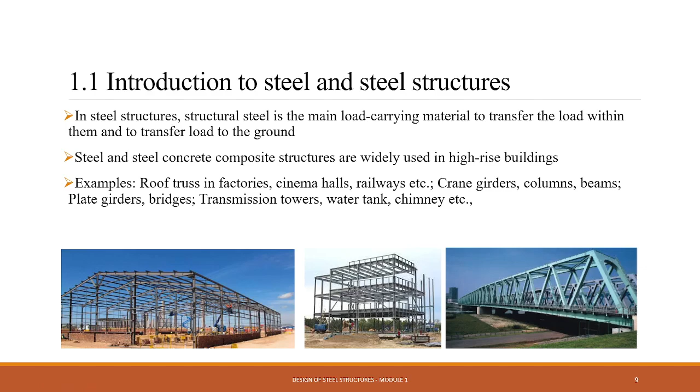Usually they are mainly used in high-rise buildings. Some examples are listed here: roof truss in factories, cinema halls, and railways.

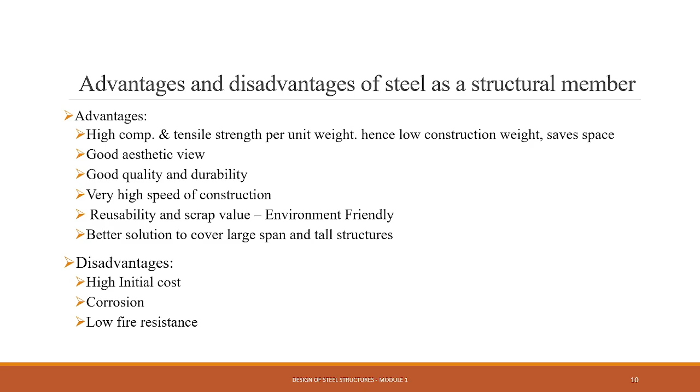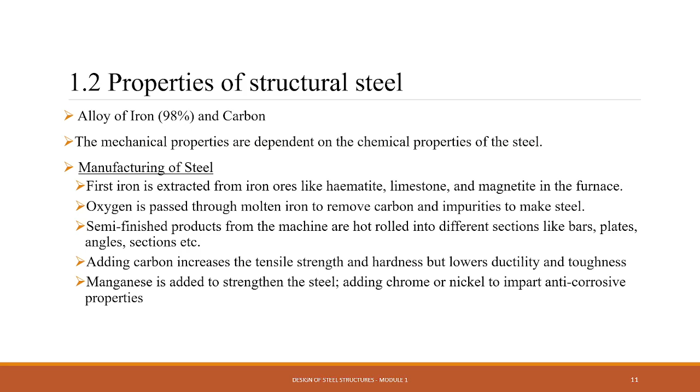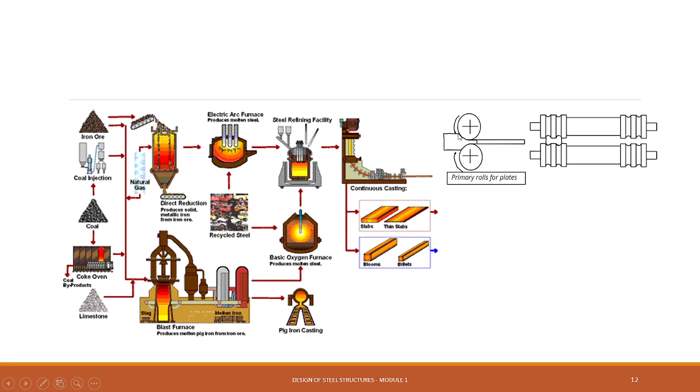This is just a figure showing the manufacturing process of a steel element. Basically the iron ore is taken, oxidized, and impurities are removed, then we hot roll it into different sections. This is the rolling process - through these rolls, different shapes of sections will be created.

What is the optimum percentage of carbon? Usually the optimum percentage of carbon is between 0.12 to 0.25%.

This table shows the different types of pig iron: cast iron has 2.5 to 4.5% carbon, whereas wrought iron has only less than 0.2%. It is one of the purest forms of iron.

Normal steel, that is mild steel, which is commonly used, has carbon content from 0.1 to 1%. Since the carbon percentage is higher in cast iron, it has high strength and anti-rust property, but the problem is that it is very brittle.

Since it is anti-rust, it is used for making water pipes, sewer pipes, and drain pipes. The water transport pipes we usually see are all cast iron pipes.

Next is wrought iron. Wrought iron has a very low carbon percentage, less than 0.2% only, so it may be more ductile.

Since the percentage of carbon is lesser, it is subjected to corrosion easily. So it is mainly used in applications where ductility is very important, that is, in chains, crane hooks, and railway couplers.

Next is steel, which is commonly used. The percentage of carbon is 0.1 to 1.1%. So basically here it has some kind of strength and ductility.

It also rusts easily since the amount of carbon is lesser compared to cast iron, and it is used to make structural steel, bolts, nuts, and rebar. So these are the various types of pig iron.

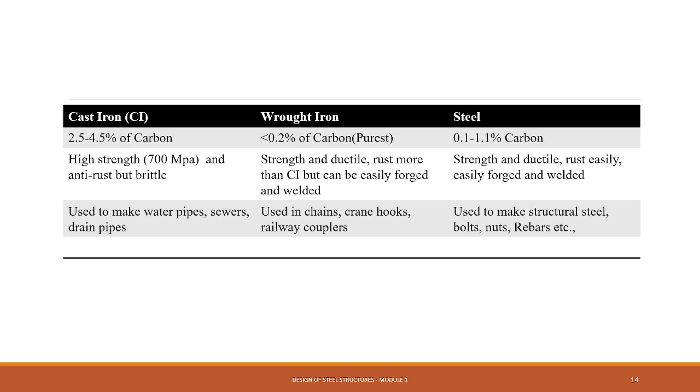Steel is further classified into mild steel, medium carbon steel, and high carbon steel. Steel is an alloy of iron and carbon, where carbon is present from 0.1 to 1.1 percentage. If the percentage of carbon is less than 0.25 percentage, we call it mild steel. If the percentage of carbon is between 0.25 and 0.6%, it is medium carbon steel. And if it is greater than that, 0.75 to 1%, it is high carbon steel.

Some of the properties of steel are given below. The steel density is 7,850 kilogram per meter cube, value is 78.5 kilonewton per meter cube. These properties are given in IS 800 in clause 2.2.4. So what is the modulus of elasticity of steel?

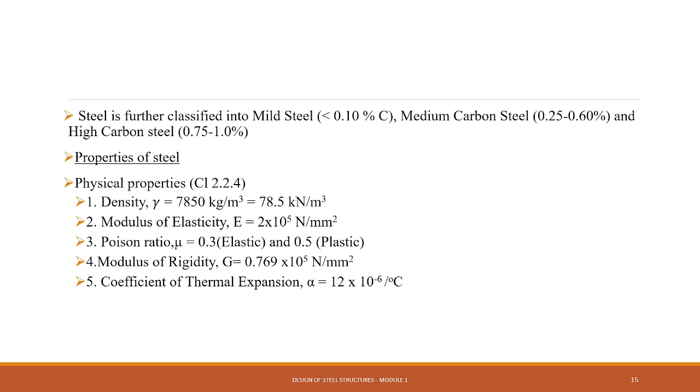It is 2 into 10 raised to 5 Newton per millimeter square. Poisson's ratio is usually 0.3 for elastic and 0.5 for plastic, and modulus of rigidity G is 0.8 into 10 raised to 5 Newton per millimeter square, and coefficient of thermal expansion alpha is equal to 12 into 10 raised to minus 6 per degree Celsius. All this is given in our IS 800 code, clause 2.2.4.

Next we will study about the types of structural steel sections. Steel is basically rolled into required shape during fabrication, which we already discussed. What are the common sections of steel available in the market?

First one is the I section, a typical wide flange I section, normal I beam. Then there is a T section, shape is like a T. Then there is a channel section, C-shaped section, called channel section. Then there is an angle section or an L-angle section. Then there are square tubes, circular tubes, like that. So different types of sections, and these properties are given in the standard steel tables.

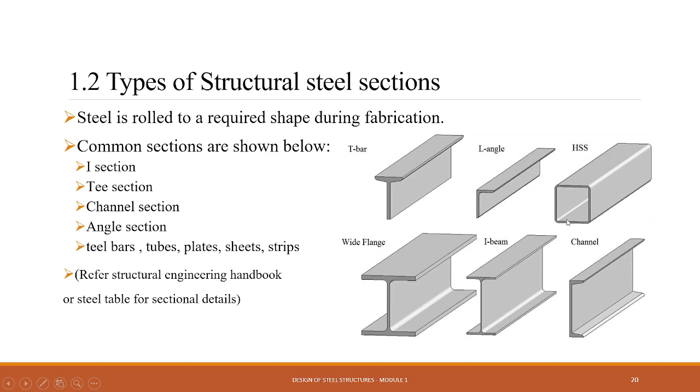Now, what is rolled I section? I section basically means it is having a web area and a flange area. The types of I section usually used in India: first is ISJB, which means Indian Standard Junior Beam. Next is ISLB, Indian Standard Light Beam. Then ISMB, Indian Standard Medium Beam. Then there is ISWB, which is Indian Standard Wide Flange Beams, and ISHB, which is Indian Standard Heavy Beams.

Each beam type has its own applications. Usually I-beams or I-sections are used as beams and columns. In normal structural buildings, structural steel-based buildings or structures, I-sections are used as beams and columns. Here is a figure showing an I-section as a column and an I-section as a beam. So there are these types: ISJB, LB, MB, WB, HB.

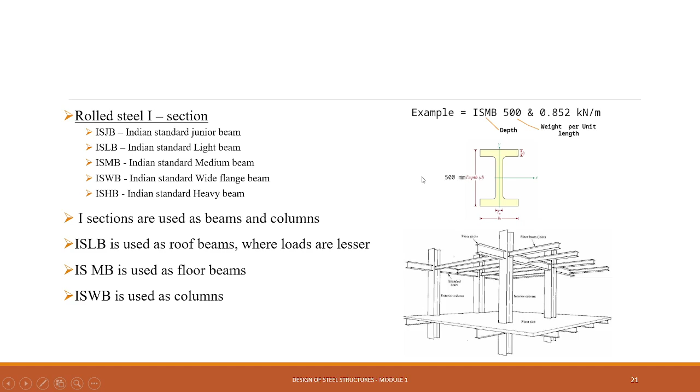Next type of section is the T section. T sections are divided into four types: ISNT, HT, LT, and ISLT. ISNT means Indian Standard Normal Beam, HT means Indian Standard Heavy Beam, and ISLT means it is a special legged...

The T sections are normally used to transmit bracket loads to columns.

Next is the channel sections. They are classified as ISLC light channel, MC for medium channel, and ISSC for Indian standard special channel sections. Channel sections are usually used as beams, especially in roof trusses, because they resist the bending moment. Examples include their use in purlins, and sometimes larger angles like channel sections such as ISHC and ISLC are used to make built-up columns.

Channels also have a flange. The outer portion is called flanges, and the middle portion is called the web. So the bottom will be having it and the flange portion is there. Different types of sections have different types of applications.

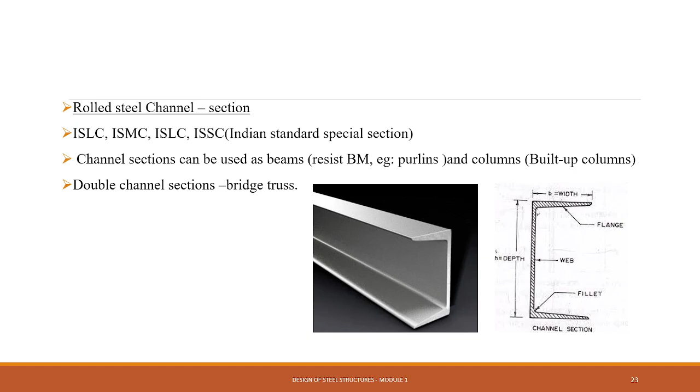Next type is the angle sections. That is Indian standard equal angles ISA, Indian standard unequal angles, and Indian standard bulb angles also. This figure shows Indian standard angles.

Angles will be having two portions, one leg and the other leg. If both lengths are equal, we call it equal angles. Sometimes one leg is larger than the other, so it is called unequal angles, and this is a bulb angle.

Angles are mainly used as axial members in purlins, that is in trusses. They are used to make built-up sections, connection members between beams and columns, as lacings and battens, etc. Bulb angles are mainly used in shipbuilding.

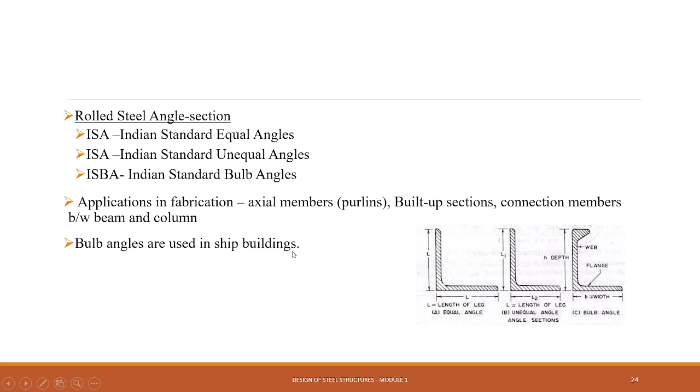Next we study about connections, that is both welded connections and bolted connections, which are very important. One important topic will be coming: what is the need of connections?

While fabricating structures, we are basically joining different elements of a structure, that is, beams and columns are joined together. To facilitate this joining, we use connections. The fabrication of a structure between two or more members is made through connections only.

Here we can see one beam I-section connected with another I-section using a plate, and this is a bolted connection. This is another joint, and it is joined by a welded connection.

Connections help to make up buildings. Connections are also used in built-up sections, which we will study in later lectures, and also in very long sections, because in factories the standard sections are like 6 meter or 12 meter lengths. So we basically require connections to join them to make very long or very large sections.

These are also critical members in the structure, because if a connection fails, the whole structure is liable to collapse. So we must be very careful when designing that a connection must not fail before the failure of a member.

A member can fail either by shear or flexure or bending, etc. In steel structures, we must always design a connection so that it does not fail, and we must ensure connections do not fail before the members. This is because connections are less ductile compared to members.

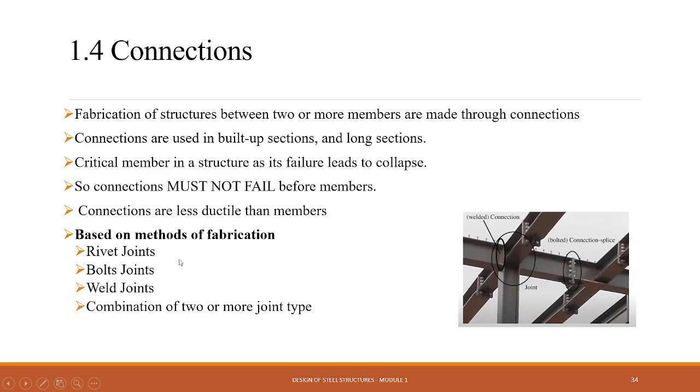Based on the method of fabrication, or what type of method we use to join these members, connections are usually classified as riveted joints, bolted joints, welded joints, or we can use a combination as well. Next we study about joints.

This is based on the alignment of the plates. Joints are classified as lap joint and butt joint. This is the important point here.

Lap joint is the simplest form of joint, where plates are connected overlapping one another. If we want to join one large plate with another plate, we can simply lap them with a particular distance and bond them to create a very simple large piece. This is a single lap joint.

What about butt joint? In a butt joint, we join two plates that are in the same plane, so we have to provide a cover plate. Providing a cover plate on one side is called single cover, and on both sides is called double cover.

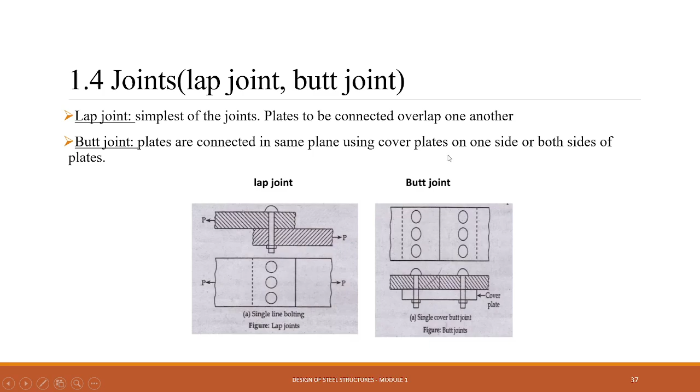These types of joining have plates joined in the same plane. When plates are connected in the same plane using cover plates, we can call it a butt joint. So this is the basic difference between a lap joint and a butt joint.

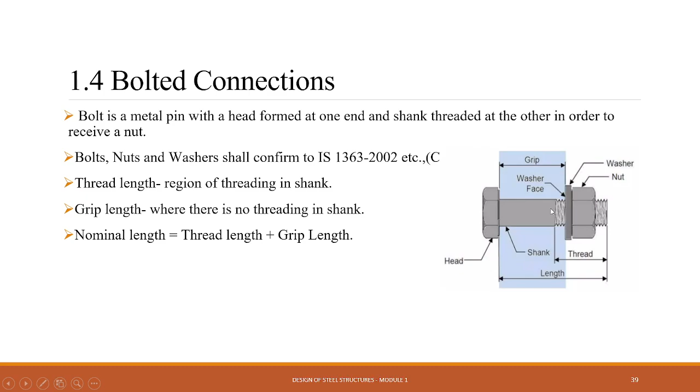Sometimes indirectly there will be plates, so the distance from the head to the washer is called the grip length. The smooth face is called the shank area, and the threaded portion is the thread area - the region of threading in the shank. Grip length is where there is no threading in the shank. Nominal length will be the total thread length plus the grip length, giving the total length. This is a figure of a bolt showing the head, shank, thread, and grip length.

Now, these are the advantages of using bolted connections. Let me pause the video a little - what are the advantages of using bolted connections?

Less manpower is required - a single or few laborers can install several bolts inside the steel sections. These bolts are of different grades and sizes. High strength friction bolts are much stronger than rivets, so we can reduce the number of bolts used, because as we increase the grade of the bolt, we can use a lesser number of them.

So a lesser number of bolts in the plate also helps, because basically in a bolted connection we are creating bolt holes, and each time we create a hole, the strength of the section of the plate is compromised.

The next advantage of bolted connections is that they require less fastening effort than riveted joints, because we can use high strength bolts. Also, bolting operation is more silent and faster than the riveting process.

The riveting process is very loud since we apply pressure for riveting. Compared to that, bolting is much more silent. Also, riveting uses high temperature, but bolting is basically a cold process, so there is no risk of fire from heating or welding.

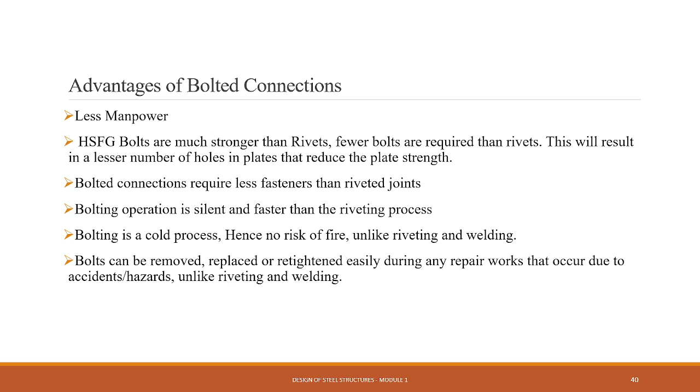Also, compared to a rivet, the advantage of a bolt is that it can be easily removed.

Now we discuss the disadvantages of bolted connections. Bolted connections have lesser strength in the axial tension area, as the area of the root of the threads is lesser, since only a small area of the bolt is joined with the plates. So there is always a chance of failure in shear and bearing.

Also, the problem is that under dynamic or variable loads - when the load is increasing or decreasing - the bolt can easily get loosened. Once the tightness is lost, it reduces the load carrying capacity.

Usually unfinished bolts have lesser strength due to non-uniform diameter. Compared to a rivet, which is very uniform, bolts have a shank and thread area, which causes some variation in strength.

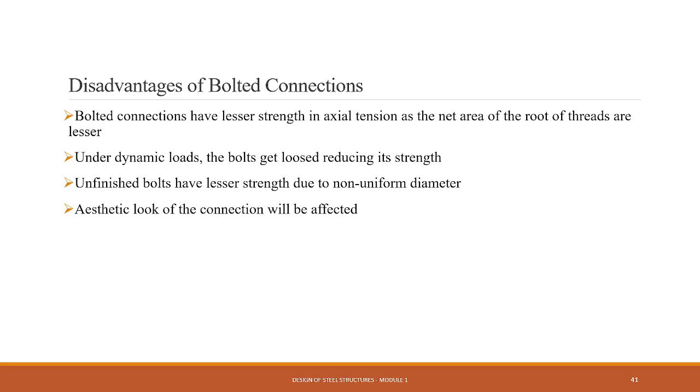Also, the aesthetic look of the connection is affected compared to a welded connection, which has smooth, seamless joints. Bolts protrude along the joints, which can sometimes be aesthetically displeasing.

Now we discuss the types of bolts. What are the different types of bolts? Basically there is the ordinary bolt and the high strength bolt, classified based on strength, or we can call them black bolt or turned bolt, and high strength friction bolts, based on the type of shank used.

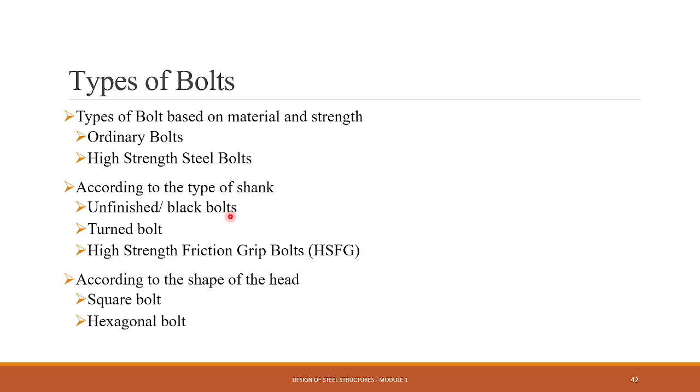Briefly, we will study what is basically a black bolt, though it's not very important from the exam point of view. Mainly for the exam, we should study the advantages of bolted connections or riveted connections, and the advantages of welded connections versus bolted connections.

This is a basic question that can be asked: what is the advantage of steel or steel structures? We can study the different types of bolts. Basically, what is blackbolt means is whatever ordinary bolt we are using, like blackbolt.

It is graded from M5 to M36, and the diameter size M36 means the diameter will be 36mm. Usually for structural steel work, we use M16, M20, M24, M30. This range of bolts forms a lot of structural steel works, especially for multi-story structural buildings.

Mainly, we use these ordinary bolts for light structures having static loads, mainly used for purlin members in roof trusses. Where there is any chance of vibration or impact or fatigue, we cannot use these ordinary bolts.

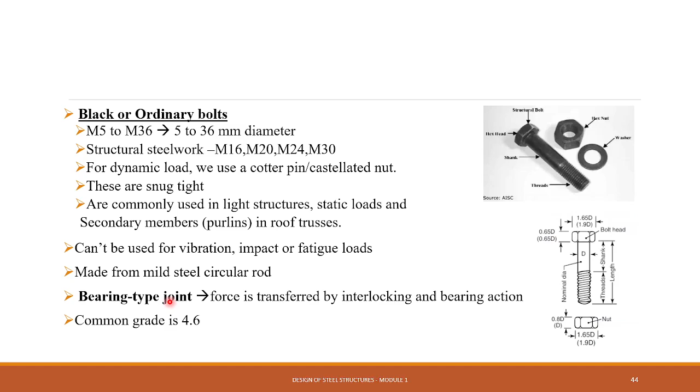Usually, if you are using ordinary blackbolts, this type of joint will have bearing type joints. The load is transferred by interlocking and bearing, and the common grade is 4.6. What is 4.6? We will discuss in the coming classes.

The next type of bolt, compared to our ordinary bolt, is called high strength friction grip bolt. Diameter will be from M16 to M36, and these are made from medium carbon heat treated alloy steel, whereas ordinary bolts are made from mild steel. Obviously the strength will be lower in ordinary bolts and higher in high strength friction grip bolts.

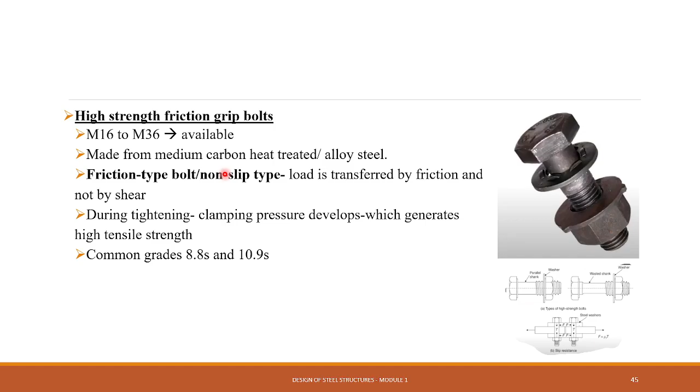Here load is transferred, by the name itself, by friction, and not by shear. When we tighten the bolt, a clamping pressure is generated and load is transferred through the friction between the bolt and the plate. This grade will be higher, say 8.8 and 10.9. This shows the advantage of the high strength friction grip bolt.

Next we study in detail about the lap joint and butt joints in bolted connections. This is more important for the exam, as design of lap joint and butt joint is a common area for questions. So what is basically known as this lap joint?

Lap joint means the plates will be overlapping each other, pasted over one over the other. Here there will be two different planes. If this is force P1 and this is P2, then P1 and P2 will be lying in different planes, so there will be some gap between these two forces.

Due to this gap there will be an eccentricity, and this eccentricity will create a couple. So in a lap joint, an extra moment has to be resisted. This joint must resist this extra moment or couple due to eccentricity between the plates, basically due to the geometry of the lap joint.

As per IS 800, if the grip length is less than 5 times the diameter, we can neglect this effect of bending. So what is the grip length? In this figure, grip length basically means the distance between the head of the bolt and the nut portion.

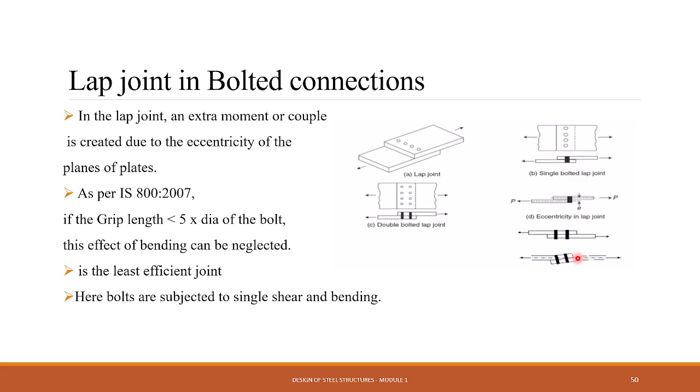In a butt joint, the plates are joined together into a single plate. Both plates will be joined together, and so both plates will be the same. The whole line of application of the force will lie in a single plane only.

So what happens in a lap joint? The lines of action of the forces were at different levels, at an eccentricity.

There are two types of butt joints. If you provide one cover plate on one side, it's called a single cover, and if you provide two cover plates on the bottom and top, it's a double cover. Either way, we require a cover plate for joining these plates into a single plate, since we cannot join them using bolts alone.

In a single cover butt joint, the line of action is the same, but the connection is not symmetrical. Symmetrical means there is some extra weight of cover plate on the top side, so even though the line of action is same, the connection is not symmetrical.

In a double cover joint, the line of action is also the same, and the connection is symmetrical because there is an upper cover plate and a lower cover plate. So we can say that the double cover butt joint is the most efficient joint.

The shear capacity of bolts will be double in case of a double cover butt joint. This is because there will be two plates to resist the shear, and the force will basically become half when there are two shear planes. So the bolt capacity will effectively be doubled.

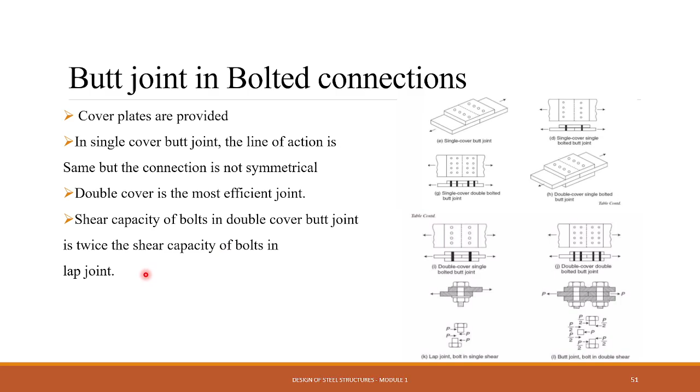For example, if you try to find the shear capacity of bolts in a lap joint and a single cover butt joint, it will be lesser compared to a double cover butt joint. There will be twice as much shear capacity for the bolt. So the shear capacity in double shear will be twice the shear capacity of a bolt in a lap joint or a single cover butt joint.

The next important and relevant topic is failure of connections, failure of bolted joints.

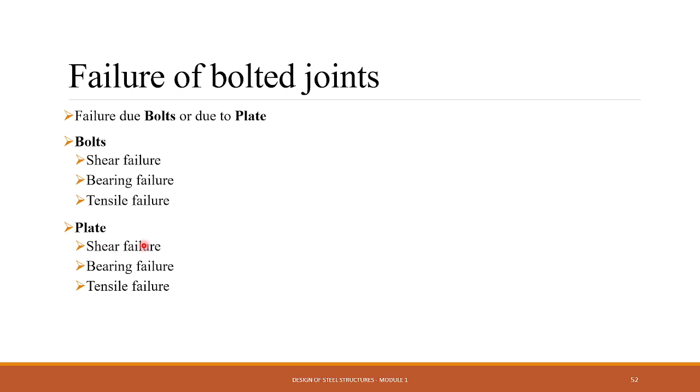These are the failures that may occur: shear failure, bearing failure, and tensile failure in the bolt, and similarly in the plate there will be shear failure, bearing failure, and tensile failure.

What is shear failure? When a load is applied on plates, shear stresses are developed as the plate slips due to these loads. This is the normal case with the plates, and the shaded portion shows the plates. When the load exceeds the capacity, the edge of the plate will exert a shear force on the bolt.

In a lap joint and single cover butt joint, the shear acting plane will be only one. In a double cover butt joint, there will be two plates - one cover plate at the top and one at the bottom - so the number of shear planes will be two. We can say the bolt will fail in double shear in case of a double cover butt joint, and in case of a single cover butt joint, the bolt will fail in single shear.

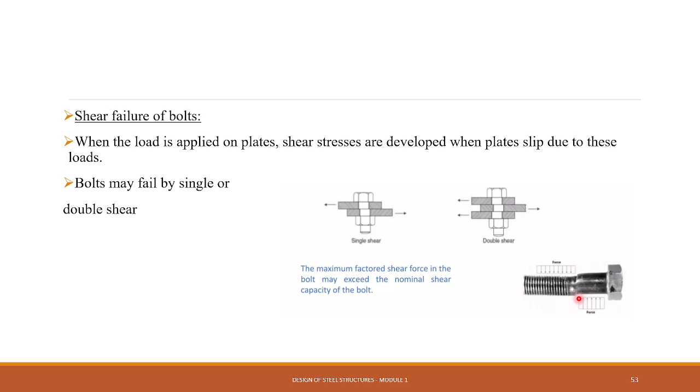The maximum factored shear force in the bolt may exceed the nominal shear capacity of the bolt. Due to an applied load P, a shear force will develop at the contact between the plate and bolt. Since the bolt itself has a certain shear capacity, when this force exceeds that capacity, the bolt will fail. This shows how the shear force is developed, and due to this, shear failure of the bolt will occur.

Next is the bearing failure of bolts. So what do you mean by bearing failure or bearing stress? It is a stress which is developed or exerted at the point of contact between two different materials.

We know that the non-threaded portion of the bolt is called the shaft. So the plates are made of high strength steel and the bolts are made of lower strength steel. This is the scenario for occurrence of bearing failure in a bolt.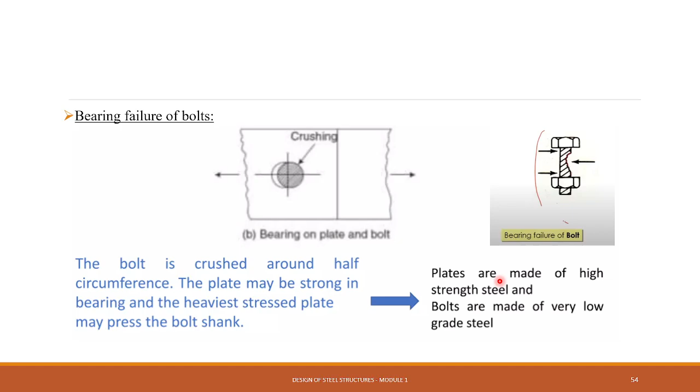Next type of failure. So what we have discussed is the shear failure of bolt and bearing failure. Now, there is a tension failure of bolt.

Due to this tightening, if we increase it beyond a particular limit, there are special tightening tools with gauge measurement instruments for bolts. If we exert a particular pressure, what will happen? There will be a tensile force created. So due to tightening, the tensile force will develop throughout the bolt, and the bolt will feel this effect.

It's just like we do a tension test on a mild steel bar, here applied to a bolt. So the bolt is subjected to tensile force and fails if the applied tensile force is greater than the tensile strength of the bolt. The tension capacity depends on the tensile strength and the minimum cross-sectional area of the bolt.

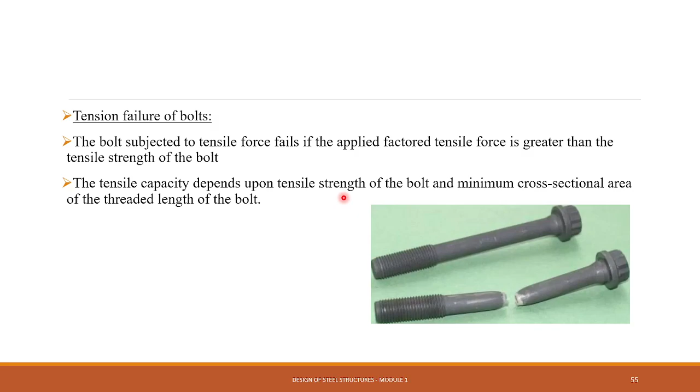Next we study the types of failures in plates. The first type of failure is called the shear failure or block shear failure of the plate. We discussed earlier that for a bearing failure to occur in a bolt, the situation is that the plate has higher strength and the bolt has lesser strength.

So in this case, for a shear failure to occur in the plate, the bolt must be of higher strength and the plate must be of lesser strength compared to the bolt. Here the bolt will be of higher strength. When load occurs, what happens? At the contact between the bolt and plate, a bearing type of failure occurs.

Not shearing, because if the force is parallel, shear stress develops, and due to the lesser value of edge distance, there will be a block type of shear failure. Block means like a rectangular block. So the bolt may be placed at a lesser end distance.

This can be prevented by adopting sufficient end distance or edge distance. Usually in design we don't consider these types of shear failure, right? We ensure this by providing adequate edge or end distance.

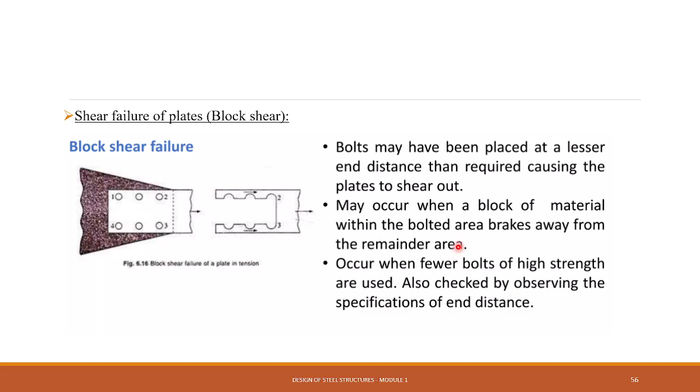This may occur when a block of material within the bolt area breaks away from the remaining area because of lesser edge distance. It occurs when fewer bolts of high strength are used. Usually it may occur when high strength bolts are used but in fewer numbers. Also check by observing the specification of edge distance. So this is the shear failure of plates.

Next is bearing failure of plates. As we discussed, we are using high strength bolts. What happens during slip? Bolts are subjected to shear force. They come in contact with the plate and crush it, since the plate material is weaker than the bolt material.

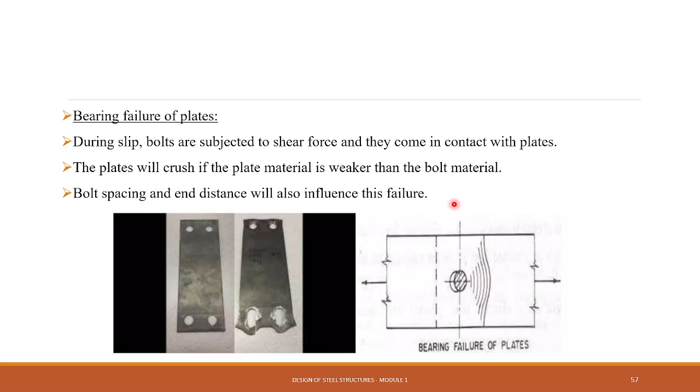Here also the bolt spacing and edge distance will influence this. If the pitch or end distance is adequate, we can prevent this type of bearing failure. Both block shear and bearing failure can be avoided by providing proper spacing between the bolt and edge distance.

The last is the tensile failure or tearing of plate. This depends on the load mechanism and the strength of plate. This is an example for tensile failure: the plate is under tensile load, and this is the weak point where a crack forms along the bolt line and the plate fails. This tension failure occurs because the bolts are stronger than the plates, so correspondingly the plates will be weaker and subjected to tensile failure.

In tension, both the gross area and net area may be present. In case of tension, we can consider the gross area. So what is the difference between gross area and net effective area?

Usually this is a plate. So what happens for bolting? We will cut holes in the plate.

This is the side view of a plate, and this is its area. Due to bolting, we will cut area like this out of the plate. This cut area is called the net effective area, which equals the plate area minus the bolt area.

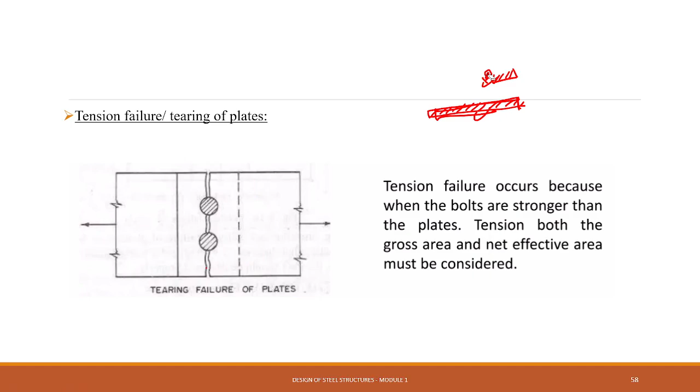Tension can occur here, or sometimes exactly along the net effective area. This is called the net effective area because there will already be holes for placing the bolts, which creates weak areas inside the plate. So when the tensile force acts, the crack will open or failure will occur along this net effective area plane. Next topic is the grade of bolts.

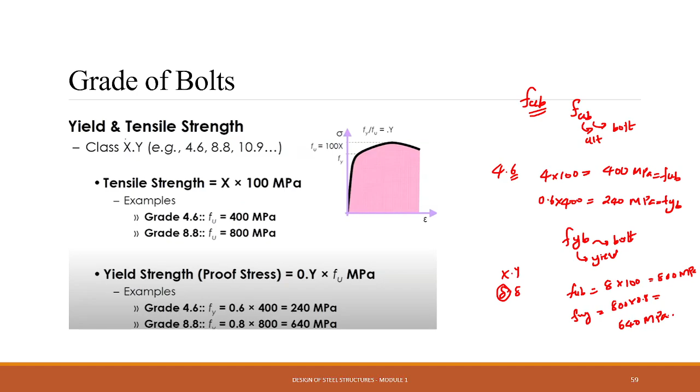The spacing taken in the direction of the load is called pitch. So pitch is the distance between two consecutive bolts measured parallel to the direction of force.

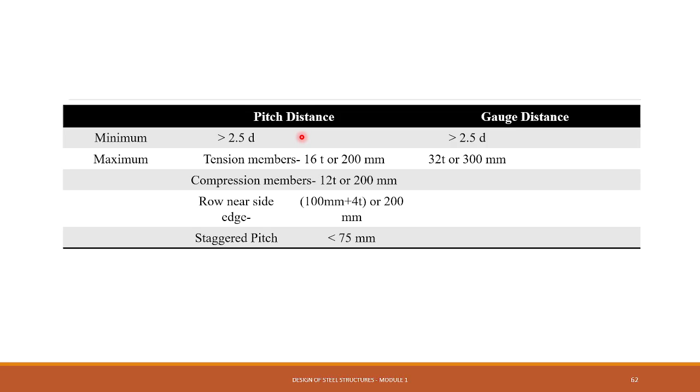The next important term after pitch and gauge is end distance. What is the difference between end distance and edge distance? Similar to pitch and gauge, end distance is the distance between the center of the bolt and the edge, measured parallel to the direction of force - that is called end distance, measured from center of bolt to edge of the plate. Edge distance is the same concept but measured perpendicular to the direction of force.

So here in this figure, this is the pitch, measured parallel to the direction of force. This other distance is the end distance - the distance from the center of this bolt towards the edge, as shown here. What about edge distance? It is the distance from the center of the bolt towards the edge of the plate, measured in the perpendicular direction. So these are the four terms.

That is, pitch, gauge, edge distance and end distance. Always remember: pitch means parallel, P for P. So pitch will be parallel, and gauge will obviously be perpendicular. Similarly, end distance is parallel, so the opposite, edge distance, will be perpendicular.

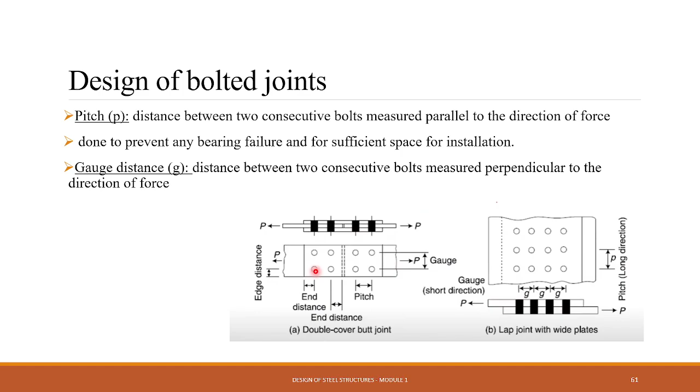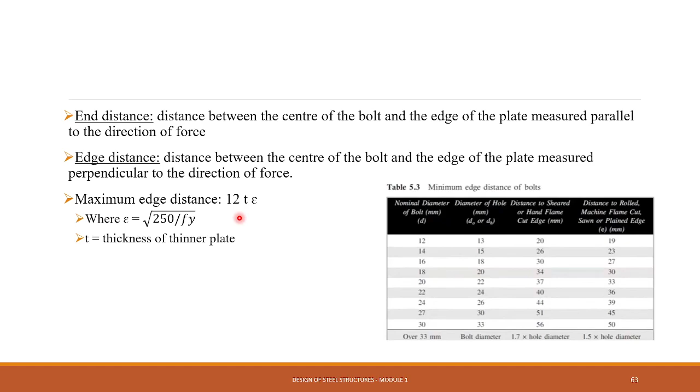In the code there is a maximum value of edge distance. The minimum value is given according to the nominal diameter, as minimum edge distance of bolts. These equations are all given in the code itself. The maximum edge distance will be 12 times T, thickness of the plate, into E, where E equals root of 250 by Fy. Normally while solving problems, Fy is taken as 250, so this term becomes 1, and the maximum edge distance we can provide is 12T. We cannot simply increase the edge distance for safety - there is a limit provided in IS code, which is 12T into E, where T is the thickness of the thinner plate. Everyone should note that T refers to the thickness of the thinner plate.

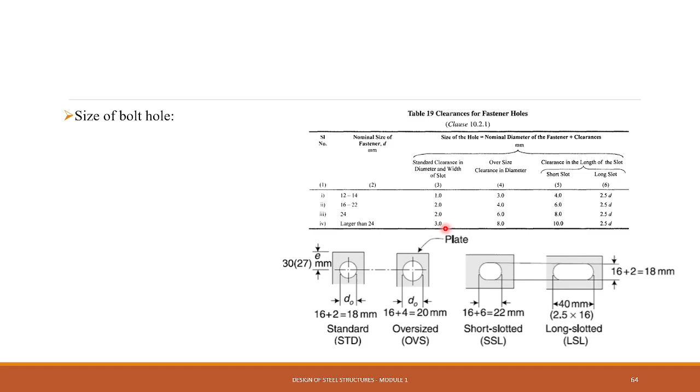There is another topic regarding the size of bolt hole. In some calculations we use the diameter of the bolt hole instead of the diameter of the bolt itself. Usually if the nominal size is like 12 to 14, we apply an allowance - that is nominal diameter of the fastener plus clearance, an extra 1mm. The standard clearance with the width of the slot is given in the code. Usually in exam questions, the nominal size is between 16 and 22, so we add the standard clearance plus 2mm to get the bolt hole diameter. Usually we apply the standard clearance, so for size 16, we apply 16 plus 2.